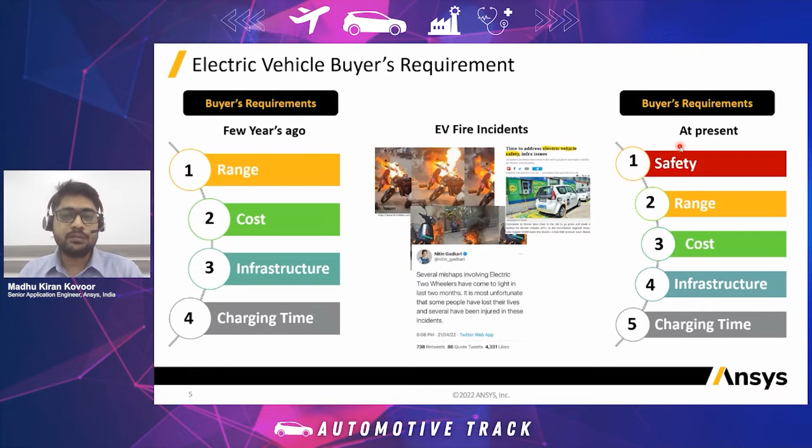Earlier, of course, range anxiety and cost were still there, but on top of that, safety has now become a priority, where every electric vehicle buyer is looking for both passenger safety and vehicle safety. Vehicle safety matters because once a user invests in the vehicle, if some damage happens, insurance is there, but we don't know how much will be reimbursed and how much loss the user has to bear. So the user is considering both personal safety and vehicle safety. Safety has become a very important factor when it comes to electric vehicles.

When we talk about the safety of an electric vehicle, the first thing that comes to mind is the battery, because the battery is the key component in an electric vehicle, which has the capability to explode or burn in some scenarios. That's where the battery plays a very important role.

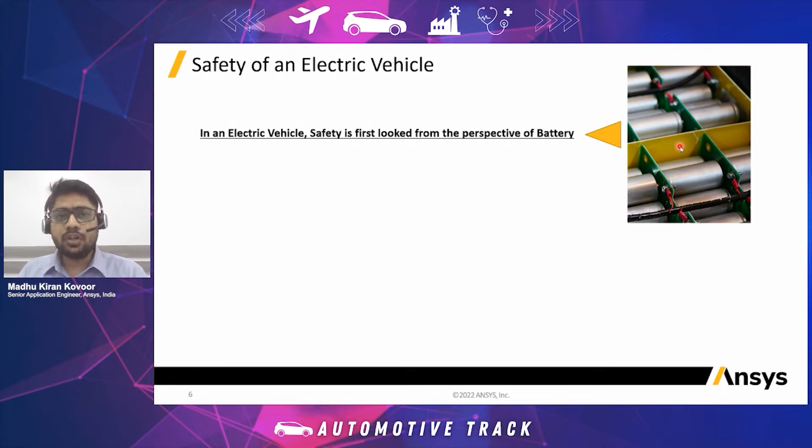Even when we talk about an electric vehicle, safety is first looked at from the point of the battery. But it's not just the battery alone. The main key factor when it comes to safety is the battery management system, which manages the battery pack. The BMS ensures operational safety, efficient charging, etc. The way the BMS is arranged is where safety comes into the picture, so BMS plays a very important role when it comes to vehicle safety.

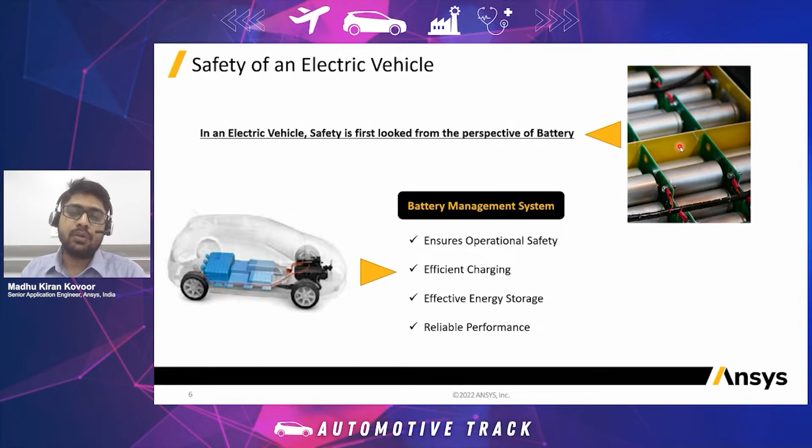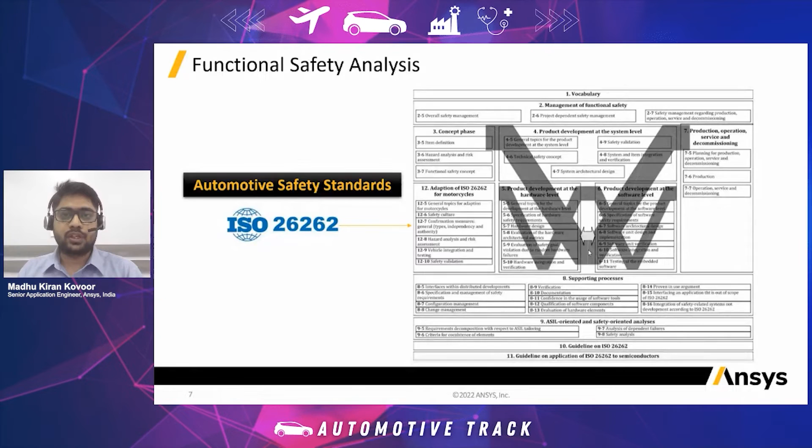When it comes to functional safety analysis, the key important factor is the automotive standards. Whenever we are developing any electric vehicle and performing the functional safety analysis of the battery management system, the main factor we need to remember is the ISO 26262 standards, the latest version being the 2018 version. Today's session will show how the functional safety analysis of a battery management system is performed in accordance with ISO 26262 standards. Earlier, the idea was that safety analysis is a process performed at the end of the product development cycle.

But that is not the case today, where the functional safety analysis needs to be started right from the requirement phase. From importing requirements, that's where the safety requirement starts, and it goes till the end of the product development cycle.

Because of this, it has become necessary that safety teams need to be deployed at every stage of the development cycle. Earlier, the safety teams used to be there at the end of the development cycle, but today that is not the scenario. The safety developments need to be there right from the starting of the development cycle.

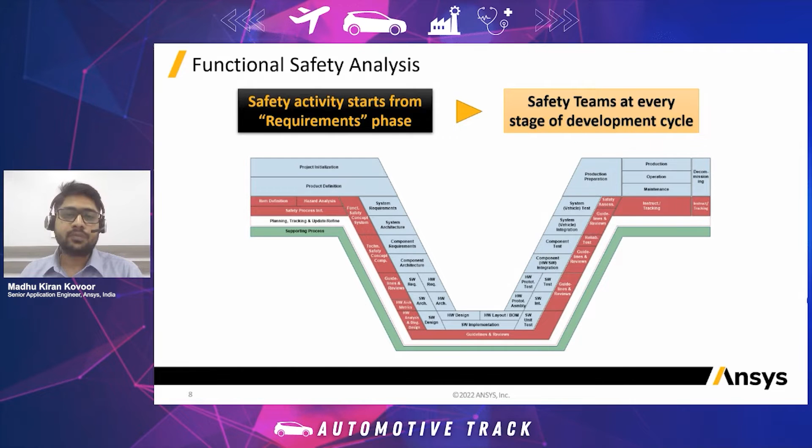Functional safety analysis is also said to be an iterative process. It is not that at the end of the development cycle we perform a safety analysis and close it. Safety analysis is an iterative process where the analysis is performed repeatedly until we get the desired results.

Now, how are engineers performing safety analysis today? What is the traditional approach? In this traditional approach, there are various softwares which engineers are using. For requirement management, they are using tools like IBM Doors and JAMA, and for drafting safety concepts, they are using Word documents. For defining architecture models, they are using SCADE Architect, IBM Rhapsody, and various other architecture modeling tools.

And for performing hazard analysis, FMEA and FMEDA, they are using Excel sheets, along with various tools for performing reliability analysis like fault tree analysis, etc.

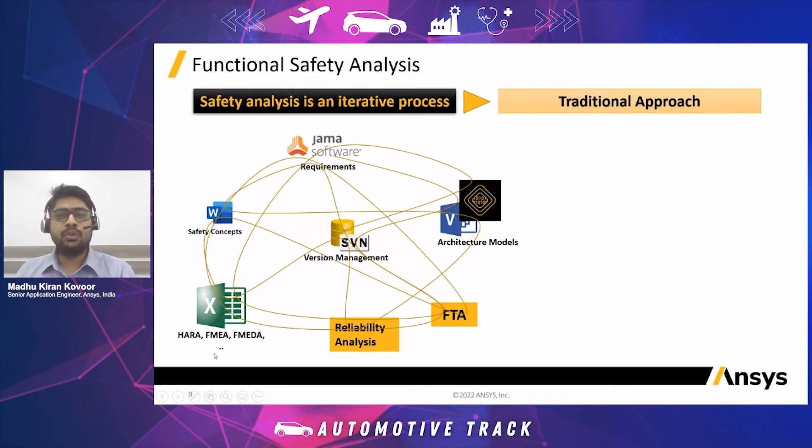The disadvantage with this traditional approach is that we need to switch between different tools to perform the safety analysis. We might have requirements, we might have safety concepts in a Word document, and these safety concepts need to be used in an Excel sheet, and the data coming from the Excel sheet needs to be exported in some other format. So there are various formats we need to exchange between.

So the disadvantage with this approach is there is no consistency, and there is no traceability, because all these are point tools and we cannot establish traceability between different work products. Whenever it comes to safety analysis, engineers today are doing a lot of repetitive tasks where multiple work products need to be made as copies when working with different tools. The disadvantage is that if any change is done in one tool, it will not reflect in another tool, and it also needs to be made as different copies and different versions.

With this, engineers today are ending up creating multiple work products, and they are also ending up creating multiple versions. So this is creating a lot of confusion when it comes to the functional safety activity.

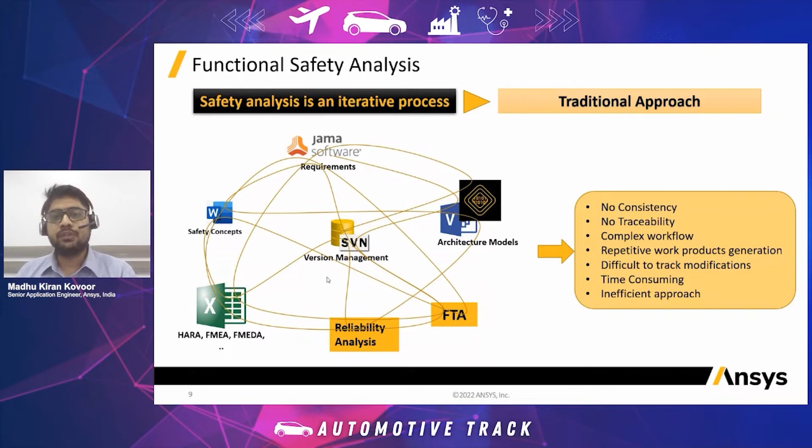For this, the best way is to go with a model-based and integrated approach, where it is always necessary to have one single tool where we create architecture models, define safety requirements and safety goals, and perform hazard analysis, FMEA, FMECA, FMEDA. It is like one single tool which helps you define architecture models, perform safety analysis, and also establishes traceability between these work products. Such workflows are necessary when performing safety analysis of complex systems like the battery management system, and this reduces time and improves efficiency.

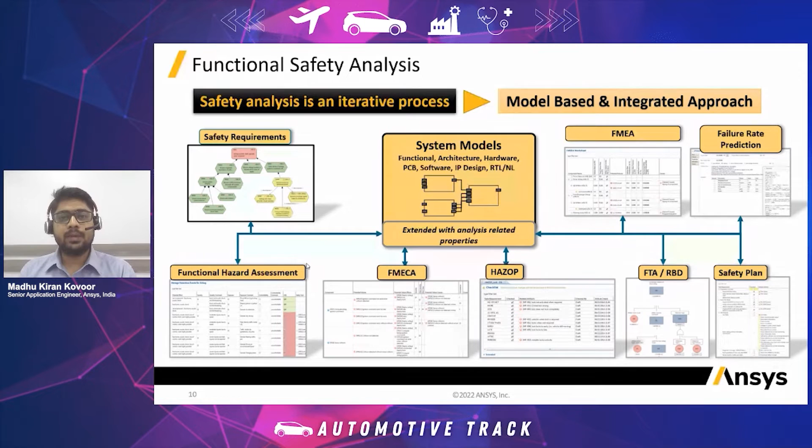So today, I would like to take you through one example where we perform the functional safety analysis with a model-based and integrated approach. I would like to take you through one of the workflows.

Let me introduce you to the battery management system. So what is the workflow of a battery management system?

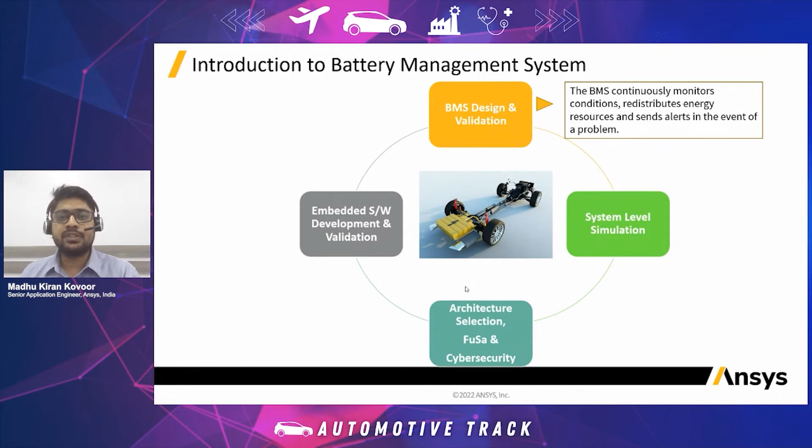We have the BMS design and validation, system level simulations, functional safety and cyber security, and embedded software development and validation, where in the BMS design phase we are continuously talking about the BMS design, its implementations, and various scenarios.

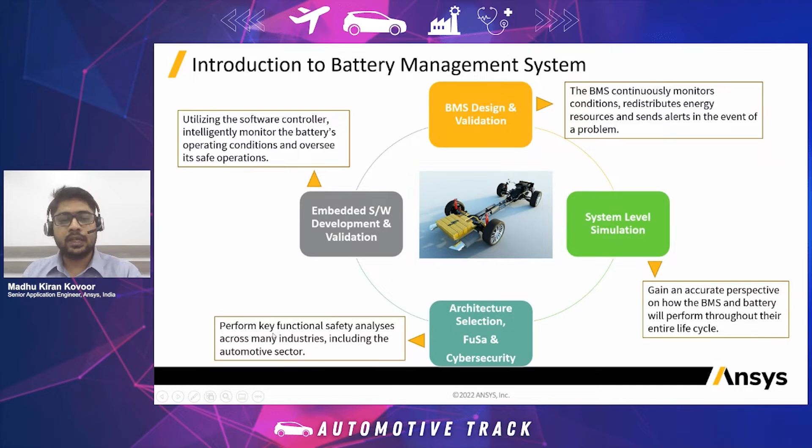When it comes to system level simulations, we are seeing various scenarios of how the BMS is performing, and functional safety analysis is also going in parallel right from development phase till implementation, finally talking about controller software development and its implementation. So today we will focus on the functional safety aspect for the battery management system.

Medini is one such tool which helps you perform the functional safety analysis on a model-based and integrated approach.

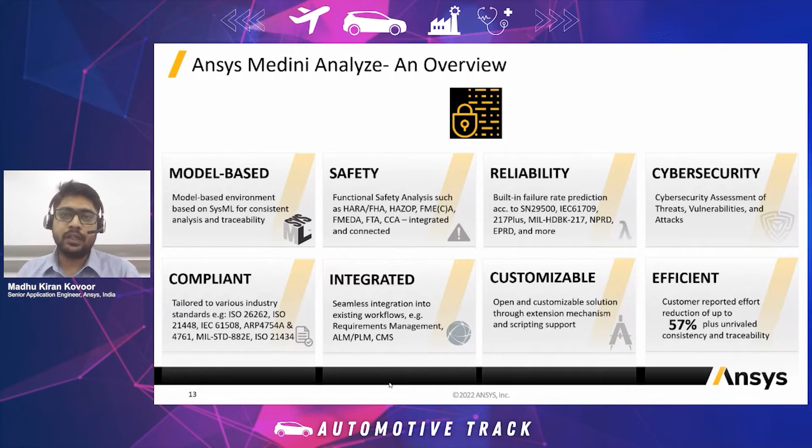When it comes to the ISO 26262 workflow, it actually starts with safety management. Then we'll be talking about item definition, defining item level functions, vehicle level functions, system level functions, and from there we'll go into performing the hazard analysis and risk assessment.

Then we'll be talking about the functional safety concept, and from there we'll go into the technical safety concept, where we'll be talking about the functional safety analysis of both hardware and software level separately.

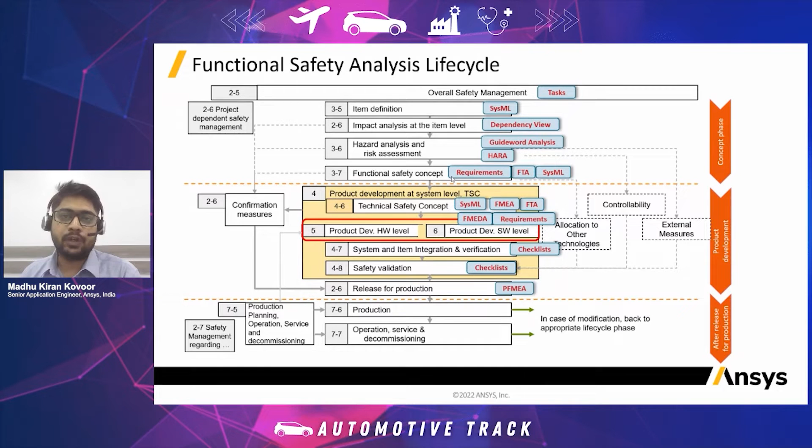Now, how do we implement this particular workflow for a battery management system? That's what we'll be looking at in this slide.

In the previous slide, we saw the functional safety workflow, starting with item definition, then functional safety concept, technical safety concept, and so on. When it comes to the functional safety concept, the first important aspect is creating the architecture models, because architecture models give a clear picture of the top level view of the system.

It actually starts with item architecture on an item level. In item architecture, we will be describing the architecture model as a block diagram. So it's a model based approach, and representing the architecture models as a block diagram is always possible.

Architecture models will be represented on a block diagram. When it comes to the battery management system, we have a BMS ECU, a crash detector, a switch box, cell stack, and some sensors which are monitoring the state of charge, state of health, and so on. This particular system will be represented on an item level, which plays a very important role when it comes to the functional safety activity.

The next comes the functional safety architecture. On an item level, we have just represented it as a block diagram, but when it comes to the functional safety architecture, we should represent the overall functionality, and we should also represent the functionalities of each and every block.

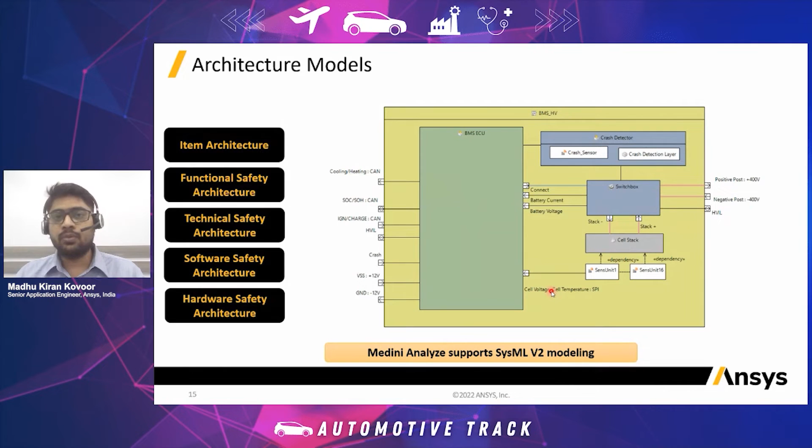Tools like Medini Analyze implement a SysML modeling approach to represent these architecture models. But if you have already created an architecture model in any other tools, you can also import them.

The next step is to perform the safety analysis. So this is where the safety analysis is performed. The first important task will be the HAZOP analysis. In HAZOP analysis, we define functionalities of the BMS ECU - what is the functionality of a crash sensor, what is the functionality of power supply modules, etc. There are various components in our item architecture which we have represented, and each and every system has various functionalities. Now, these functionalities consist of various malfunctions.

We need to represent these malfunctions in HAZOP analysis. There are various templates provided by various tools, which we call guide word templates, and there are various templates available. Using these templates, we define functions and their malfunctions - we define a function and tell in whatever ways this function can fail. That particular analysis is performed in the HAZOP analysis, and we also define various hazards in the system - if a particular function has a malfunction, what hazard it leads to. So all the hazards also need to be defined in this HAZOP analysis.

From there, the next step is to perform the hazard analysis and risk assessment. Let us assume there is a battery, there is an overheat, and we need to see in what condition this particular malfunction is occurring, and whether that is severe or in what situation this is occurring. All the scenarios need to be described in the hazard analysis and risk assessment.

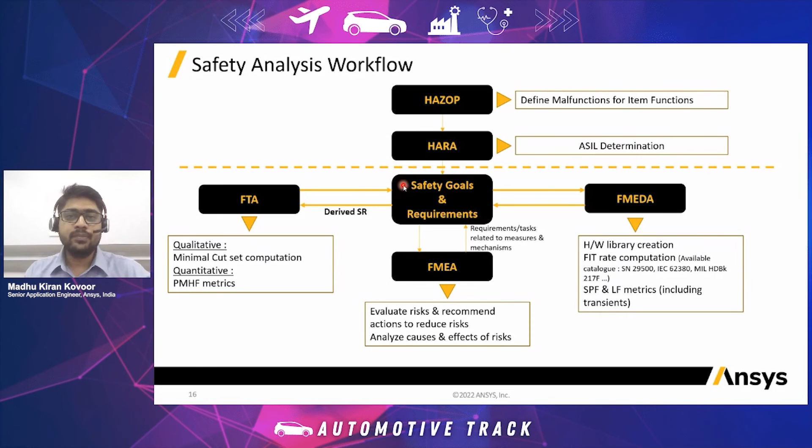The first important advantage of this approach is traceability. As we perform the FMEA, FMEDA and all these analyses, we also arrive at various metrics like PMHF, SPFM, LFM. With this, we can say that if a component has a failure mode, how this failure mode affects the top level safety goal violation or function malfunction, how it's linked to the top level. We can establish traceability because of the integrated approach. As we perform all the analysis in one single tool, this helps with easy traceability, and we don't need to create multiple work products, which is very consistent, and we don't need to repeat the tasks.

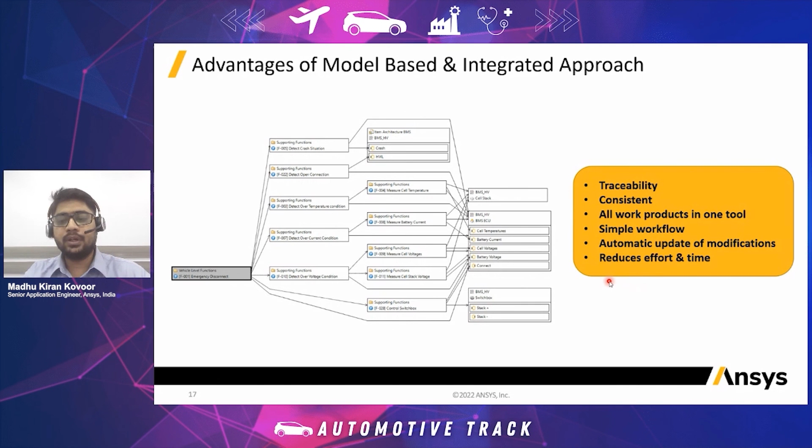It's a simpler workflow, and if there are any updates anywhere in the safety analysis workflow, we can simply update. Let's assume there's a safety goal modification in the HARA sheet - once that modification is done, it will affect all the areas where that safety goal is linked, so we don't need to manually update at every stage. This reduces the effort and also reduces the time. So this is a very important feature of using the model based approach.

So if we look at some use cases where customers are using model based approach to implement their functional safety activity, not only do they perform safety analysis, they can also integrate with other areas of their system - like system engineering tools, graphical tools, or other physics based platforms. So whenever we're dealing with complex systems like battery management systems for functional safety analysis, this approach really helps. You can also see customers who are using this tool for performing the safety analysis.

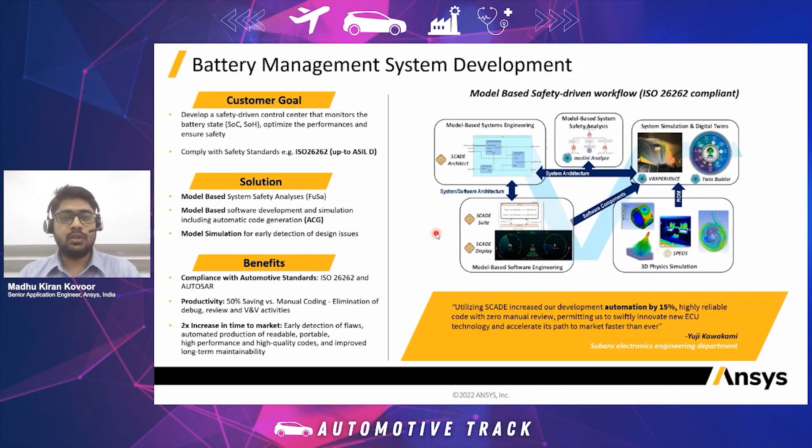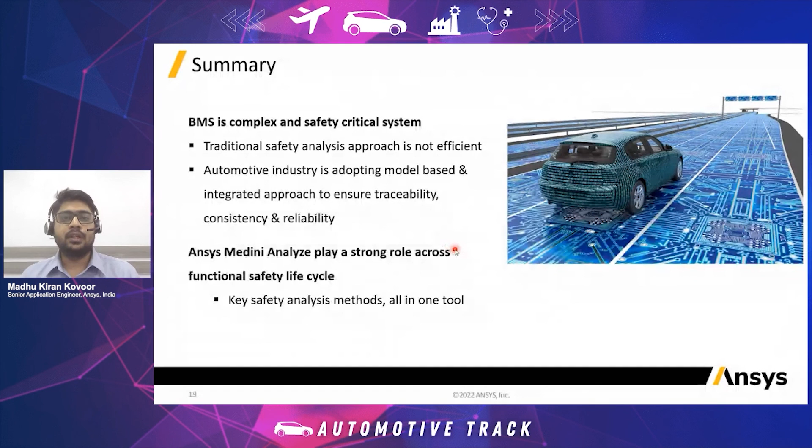The main idea is that whenever we're dealing with complex systems like the battery management system, the traditional approach is not recommended because of its complex nature and too many iterative steps. So a model-based and integrated approach really helps in this case, and Medini Analyze is one such tool which helps you perform such kind of integrated safety analysis.